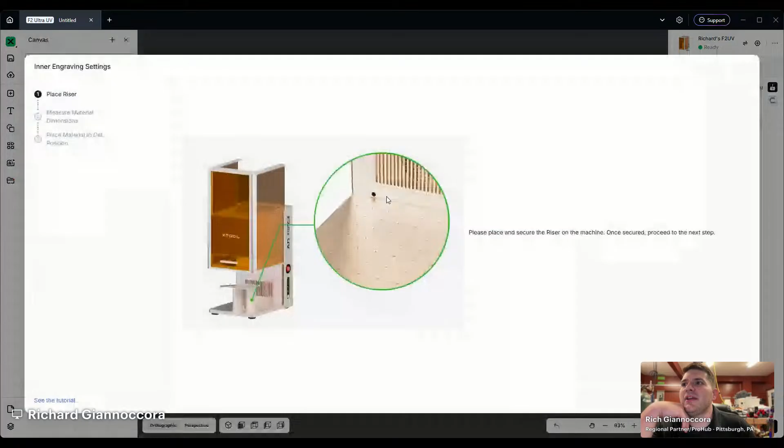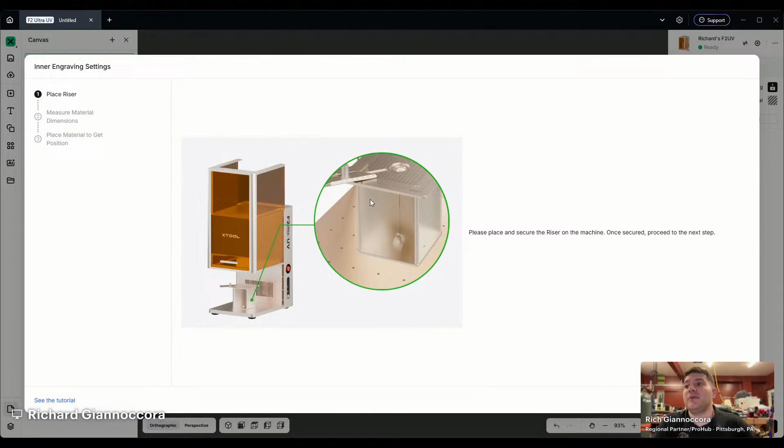So this is going to kind of set us up to where we need to be to do what we want to do here. This is going to tell us we want to make sure that our riser is on the machine, which it currently is. And then we're going to proceed to the next step.

And it's going to ask us what our material dimensions are that we are working with. So tonight we are working with a 50 by 50 by 80 cube, so we're going to go ahead and just change that in there. Again, you can set this if you're working with cubes, spheres, cylinders, stuff like that. If any of the materials you're working with has a different refractive index, you can change that there also. Once that's set, we're going to hit next.

And that'll actually tell us that we want to make sure that on our base, we want to set our slide here to a value of 35. That'll essentially help with the centering of your material on the actual dot.

So we're going to use that with the positioning piece, and then we're going to go to import canvas. Okay, so that's essentially going to bring us to this point here. Basically, you can move around and look at what your block's going to look like on the actual riser base that's in the machine. You can set your actual views down here as you choose for what you're working with.

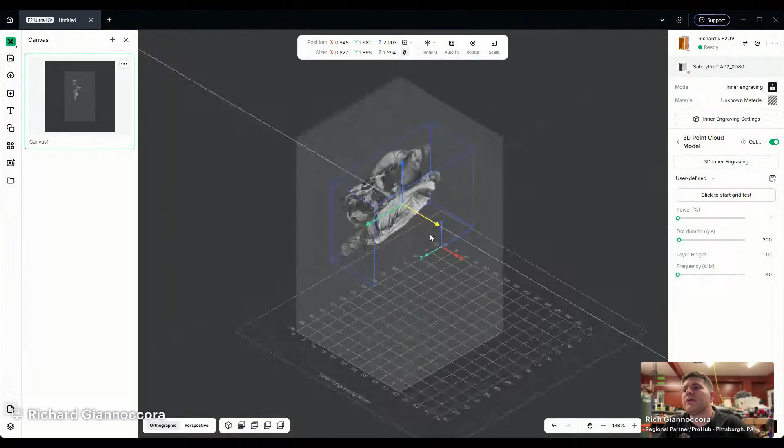Oop, I guess we need to actually make sure we're looking at this the right way, guys. Sorry. What is going on here? This one has me all messed up.

Sorry guys, hang on, my screen share. I'm looking at it backwards on the one screen here real quick, so bear with me here for just a second. Let me get this fixed. I want to make sure. Sorry, that's okay, you can make fun of me in the comments. I will allow it.

There we go, that's a little bit better. Okay, let me share this back to you guys.

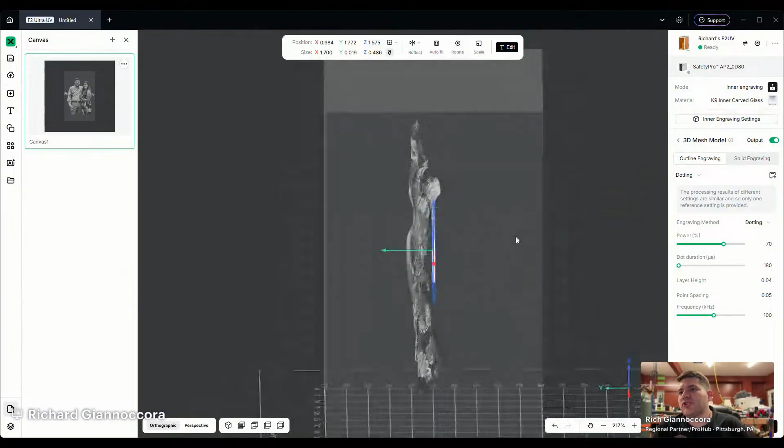We need to take our size down just a little bit, that way we're fitting within the confines of the actual cube that we're working on here. So we're going to go with 1.7. Okay, now it is currently showing at the center of the cube there. It doesn't have to be there. We can put it wherever we want it to actually be.

We can actually angle things back too. So we're going to move this around. Let's say, just like that, right? And then if you really want to, you can actually add a little bit of depth to this. So we could even take and just move this out, and we're going to break our hyperlink here. That way it's not going to tweak our size too much.

But we can actually take, and like, let's say we wanted to do like an eighth inch. We can actually make it that thick if we wanted it to be, but obviously we can go whatever size. We're going to go with 0.05. There we go. So it gives that text some nice definition.

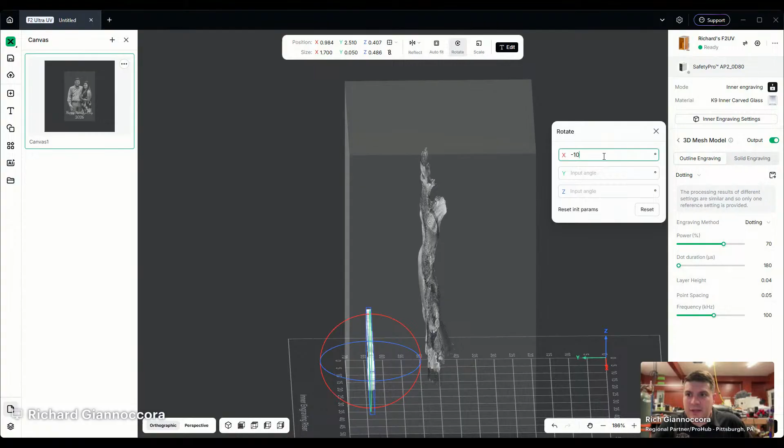And even if you wanted to kind of kick it back on an angle a little bit, you actually could. So if we wanted to rotate it back, let's say negative 10 degrees, we could. And then even kind of give it a little bit of definition in the actual cube, which is real nice. So you do have those abilities to do those things.

Hello, Carrie. How are you?

So whenever we are working with the K9 Inner Carved Glass out of xTool, I really recommend just using the reference settings that they have built into the actual program here, letting it process as such. These settings actually work really good. So we are all set here.

So let's say we are ready to rock and roll and we want to send it over to the machine. Come over here, we hit process. This will give us an idea of what our processing time is going to be. This is all dictated upon the size that you're working with, what all's going in there, your point cloud spacing, stuff like that.

Your spacing, if your number is a little bit lower and you're a little more dense, that'll actually raise this number quite a bit here. But we're going to go ahead and we will let this one send to the machine, as it's doing right now.

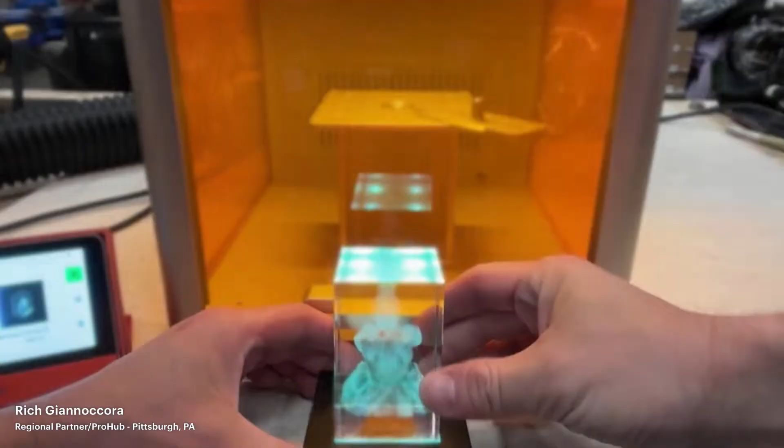Just so you guys know, this is kind of what we're looking at with an actual finished cube, on an LED light base here. You can have them change colors, it could be solid color bases, or you just don't use any base whatsoever. But this is kind of what those point clouds look like when they do engrave in.

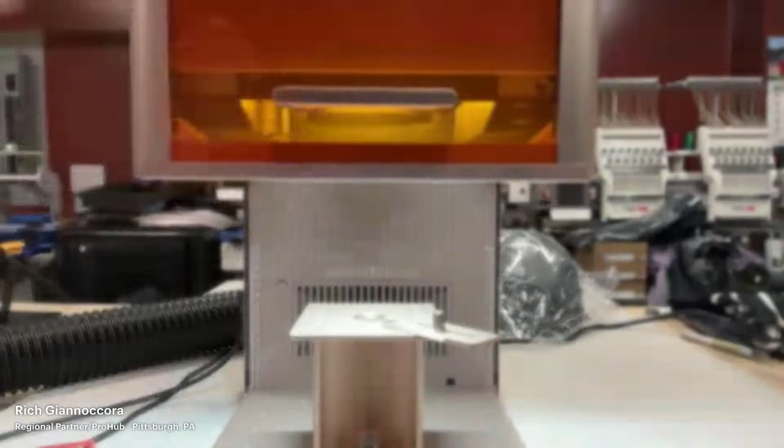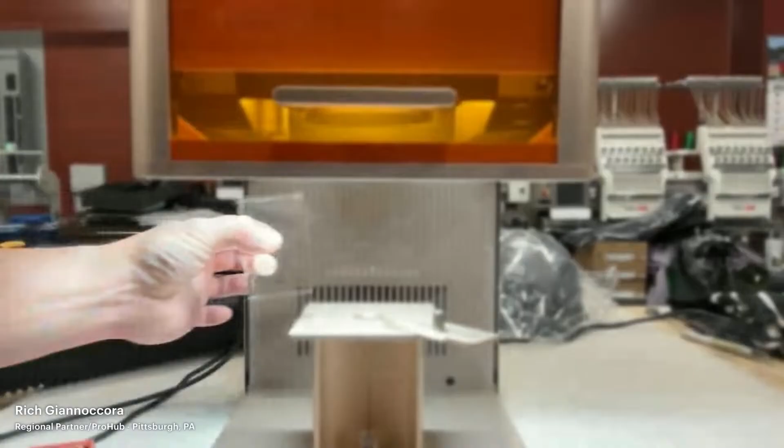So you guys get a little bit closer so you can see this. Open this up here and grab one of our cubes and get situated. Whenever you guys are setting these cubes inside the actual machine, you don't want to touch any of the top or bottom faces of them, as that's kind of where that beam is actually hitting off of. So I'm going to set this right on here. Our positioning piece is already set at 35, so we're just going to get that locked in with where we need to be.

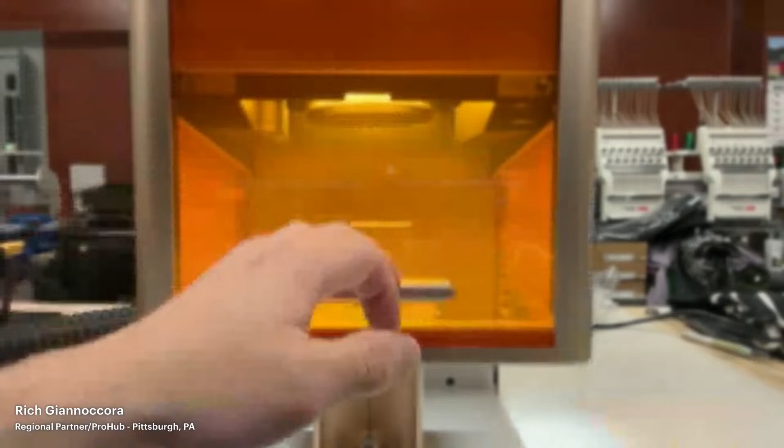I'm going to drop this guy down and resend that file real quick.

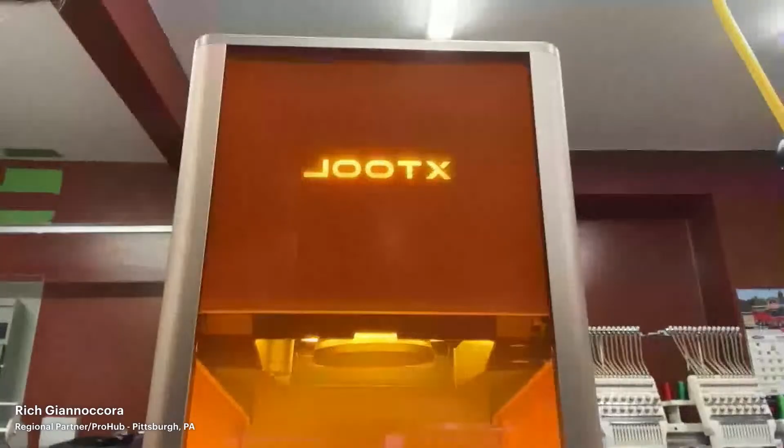And we are going to go ahead, and I will flip this around, this one right here. Let's see if we can fix that camera positioning. There you go, that way it doesn't look like it's backwards. And we are going to go ahead and hit go, let it do its thing.

One second guys, quick reset here because I like to leave my protection caps in. Make sure you pull your cap out, it's a rookie mistake. We're going to have to start that one back over.

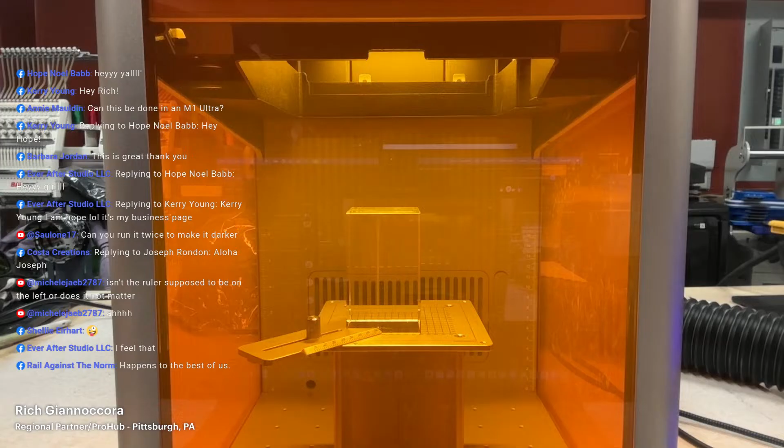Kick on my amazing AP2 Max here just to provide that temperature balancing in that chamber. Again, you do not need the AP2 Max with this machine at all. I'm just in a slightly different location from where this machine normally is, so I'm just utilizing it right now for the moment.

Rail against the norm, yep, happens to the best of us. Been a long last couple of weeks, but I do appreciate being able to spend time with you guys.

Can you run it twice to make it darker? No, because essentially as the dots are engraving in there, the head is actually moving up, per se. So if you were to bring that back down and start trying to hit those points again, you may cross over other points that are in there, cause it to deflect, stuff like that, and or ruin your actual engraving. A lot of that is going to be in image prep and how you set things up.

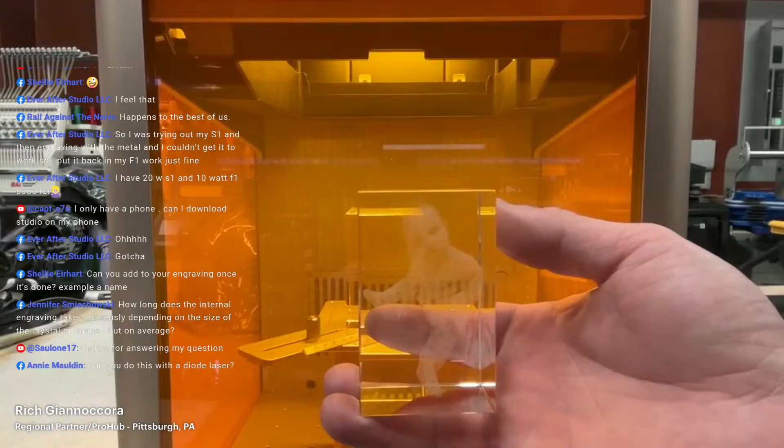This is dot spaced at, I believe, 0.03. This here, I believe, was 45 minutes. Some nice 3D relief.

This one here specifically probably was closer to about an hour, just because of some of the spot densities that we have in there. I know it's a little hard to tell from a PC camera, but it's a little bit better right there.

And you got to think though too, these are timeless memories that you're essentially engraving. They're never going to go away unless you break the glass.

Annie, to answer your question, no, you cannot do this with a diode laser. It is not possible. You do need the UV with the inner engraving lens.

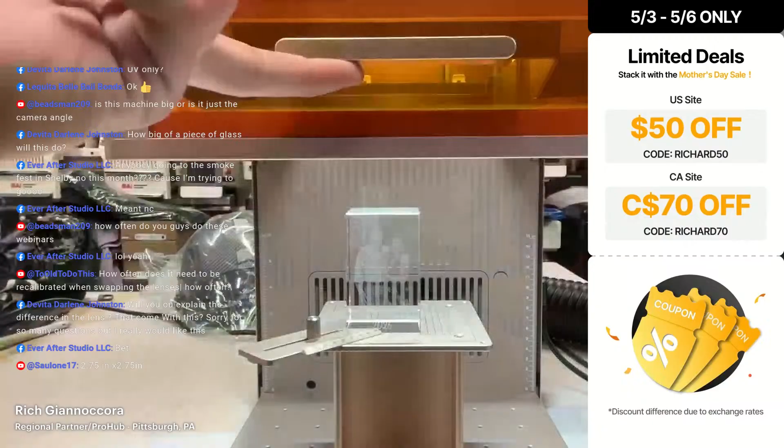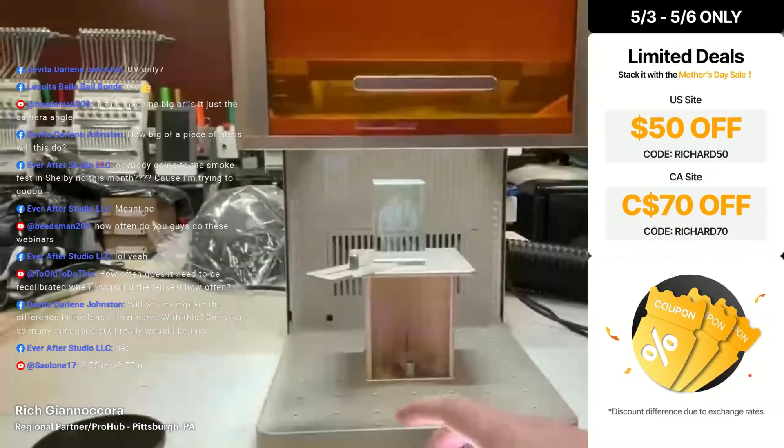Okay, up here, so basically our cube, we are complete. At this point I'm going to cut off that AP2 Max, I also have a nice hum in the background. So we are done here, and I'm going to bring my laptop back and put my little light base in for you guys so you can see. I'm going to grab this one here, and essentially we can set it right on our light base.

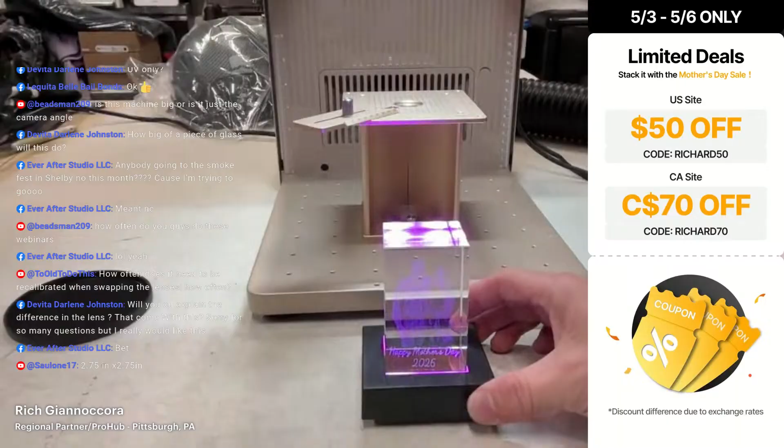I don't know how well you guys can make that out from the camera specifically, but this is our completed engraving that we just did here. Again, this was with a little bit of a wider dot spacing just for time purposes for you guys tonight. Still got some really nice quality out of it, even with a wider dot spacing.

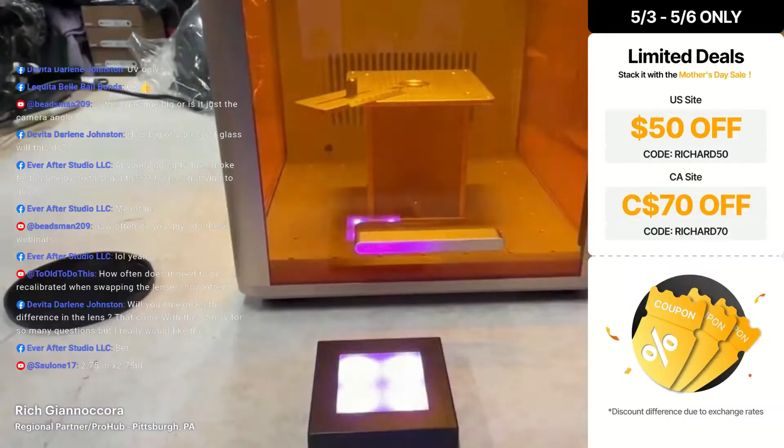Like I said, some of the other ones I have done here recently of my daughters. This is going to be my Serafina here, this was from Disney in her Cinderella dress. And there's our side shot, nice beautiful depth. These are the ones that take just a little bit longer, just because the point spacing is a little bit tighter together. But the quality that this machine can put out, even in a wider spacing as you saw before, is just impeccable.

That's my other daughter, Alessia. A nice, beautiful depth there.

Okay, I'm gonna bring you guys back with me. Happy to answer any and all questions you guys may have relating to either the UV or really just any xTool machine that is out there, so definitely fire them off here in the comments. As you guys had seen there, had a nice beautiful processing of an inner glass cube. So any questions, fire them off.